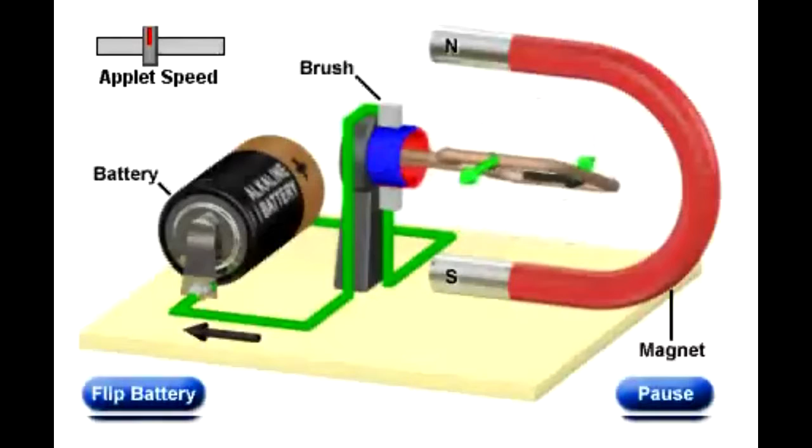This video is to show the DC motor principle. You'll see how the DC motor works and how it turns. First of all, we'll look at the magnetic lines of force from our magnets. Next, we're going to apply current through our armature, and we'll see that there will be a resultant force on our armature which is going to cause the armature to spin.

This resultant force will continue in the same direction and keep the armature turning. You can see once it reaches this point, there is a gap in the commutator, and there will be no more current temporarily through the armature. At this point, it relies on the inertial force of the armature just to move it over so that it will recontact once it spins that little bit further.

Now you can see the brushes have recontacted the commutator and the current is going in the opposite direction through the armature. However, it's still relative in the same direction according to the fields, and this will keep the motion going in the same direction, and around it will go.

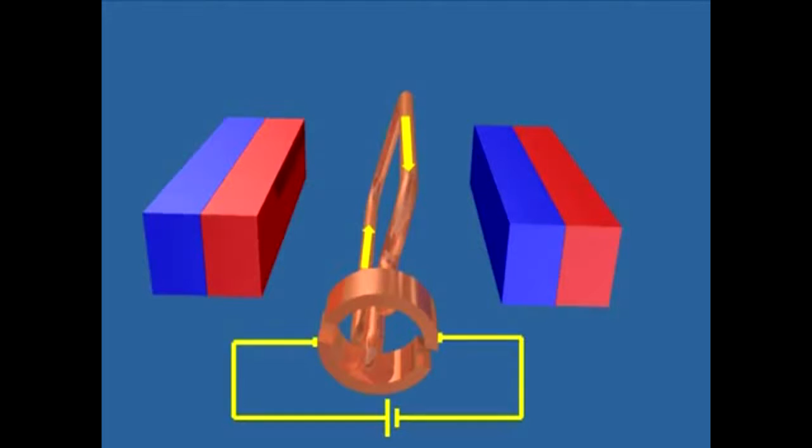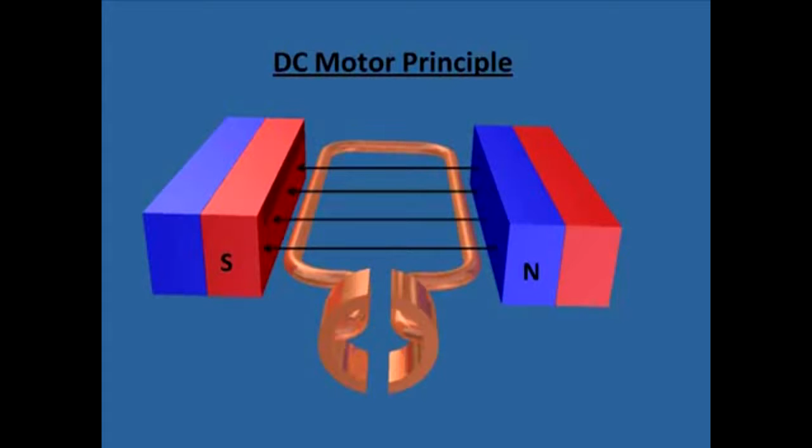This video is to show the DC motor principle. You'll see how the DC motor works and how it turns. First of all, we'll look at the magnetic lines of force from our magnets. Next, we're going to apply current through our armature, and we'll see that there will be a resultant force on our armature which is going to cause the armature to spin.

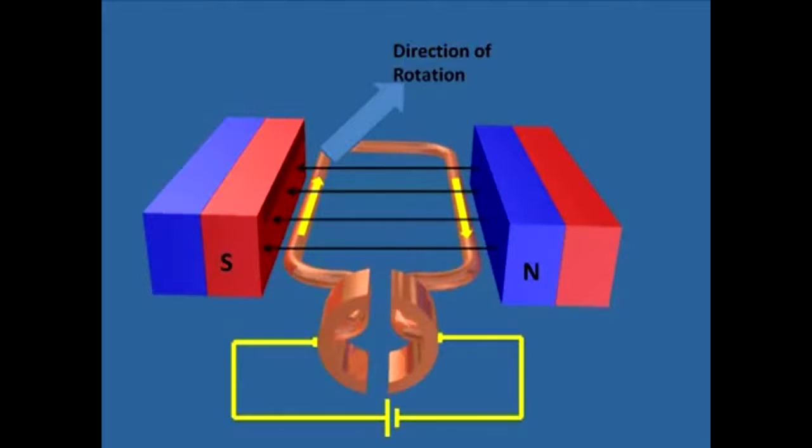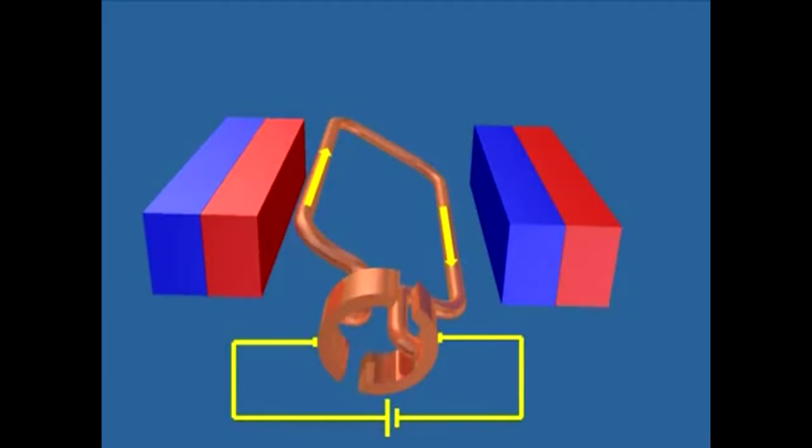This resultant force will continue in the same direction and keep the armature turning. You can see once it reaches this point, there is a gap in the commutator, and there will be no more current temporarily through the armature. At this point, it relies on the inertial force of the armature just to move it over so that it will recontact once it spins that little bit further.

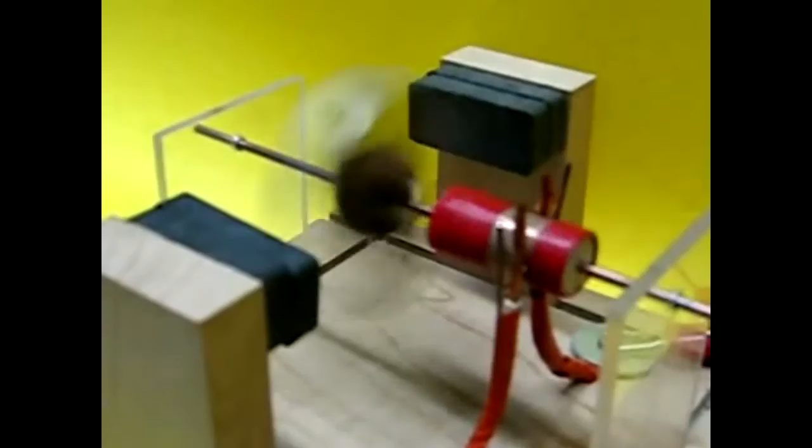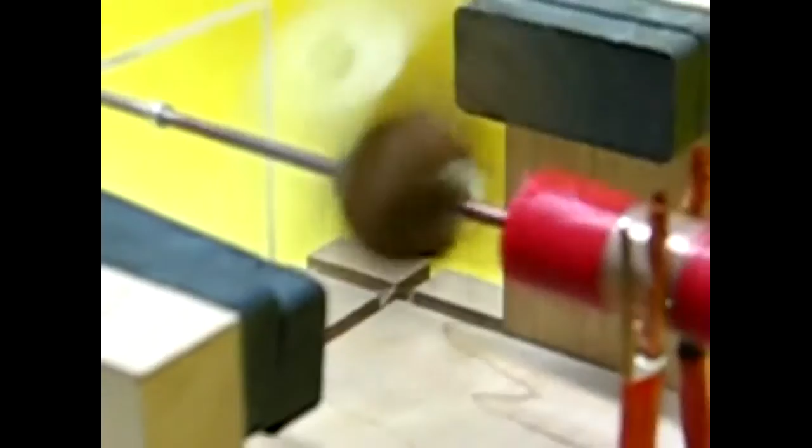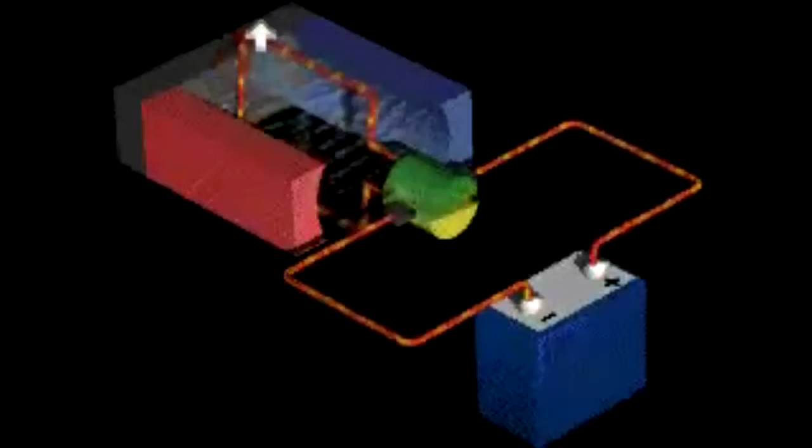In this simple electric motor, a current passes through a coil in a magnetic field. This forces the left side of the coil upwards, and the coil rotates. When the coil is vertical, the current shuts off for a second. The current is reapplied, and the other side of the coil moves upwards. This is the simplest model of how electricity creates mechanical energy.

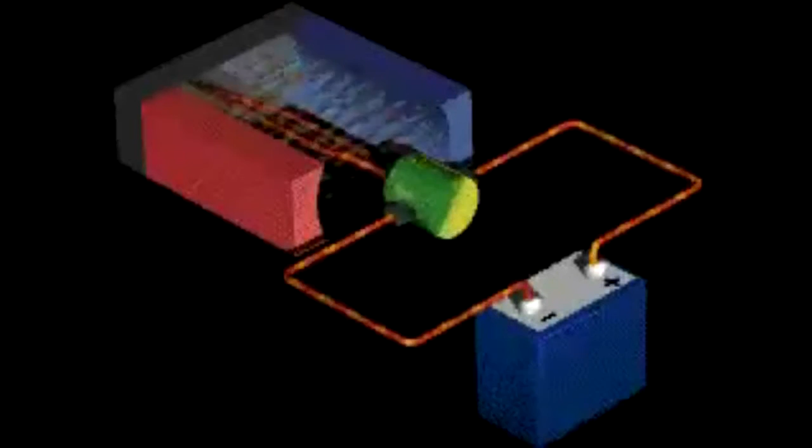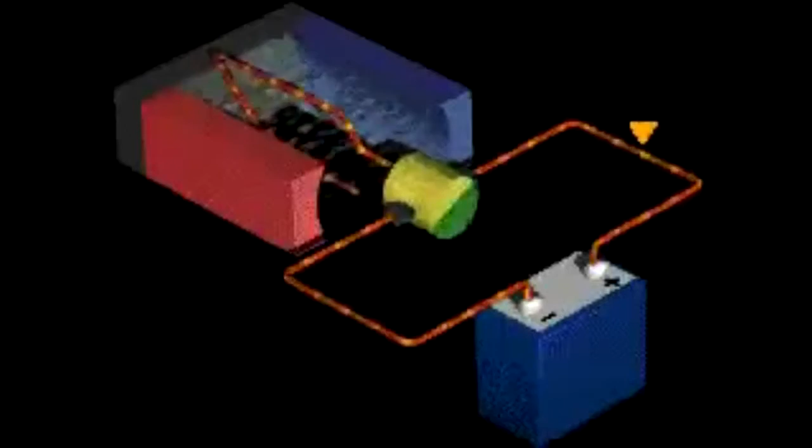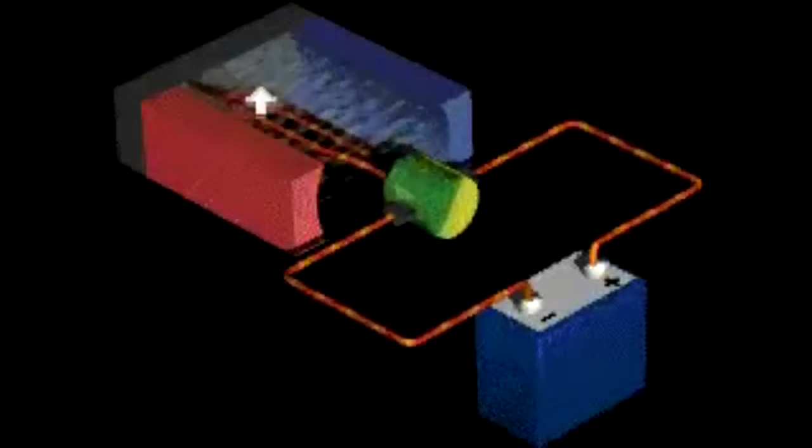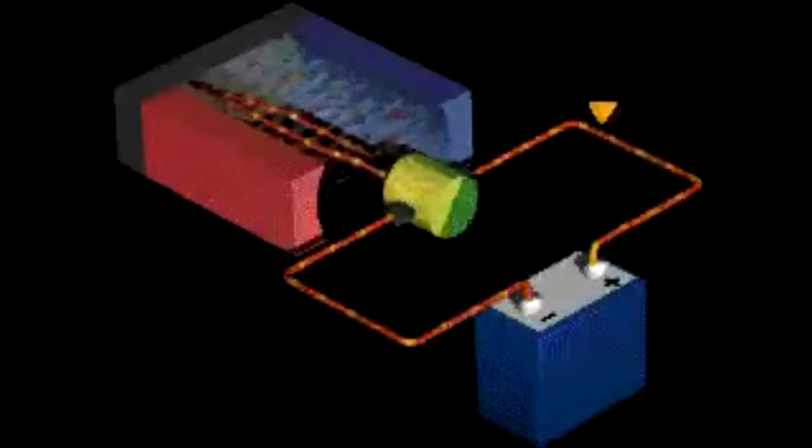In this simple electric motor, a current passes through a coil in a magnetic field. This forces the left side of the coil upwards, and the coil rotates. When the coil is vertical, the current shuts off for a second. The current is reapplied, and the other side of the coil moves upwards. This is the simplest model of how electricity creates mechanical energy.

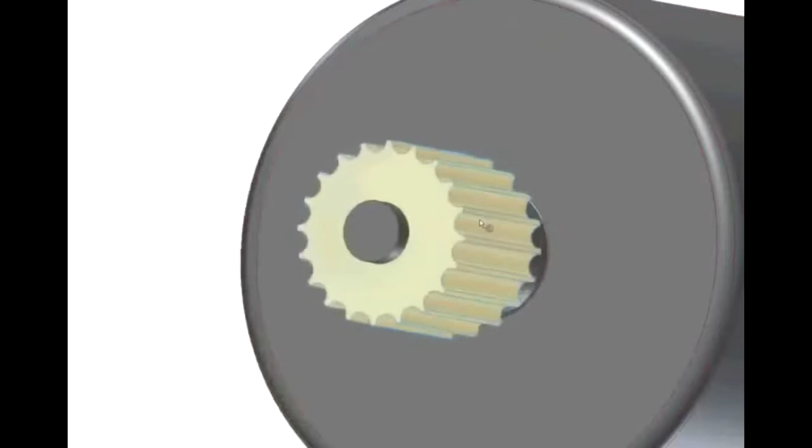Today I will show you what's inside the DC motor. Now I have prepared my work model of a DC motor for this reason, and as you can see this is fully functional. It can rotate either way, clockwise and counterclockwise, and on the back side you can see the bearing that holds the shaft, and the shaft itself, and the two poles that the motor is powered from.

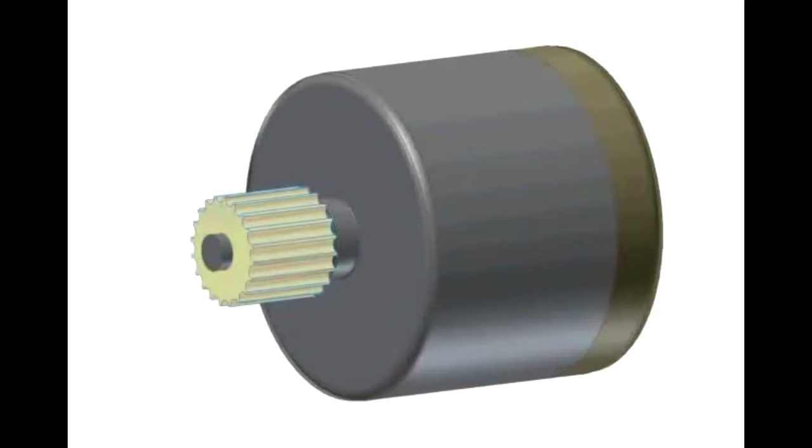Now instead of breaking the motor apart and explaining each part as I take it out, I would rather prefer to go backwards, and I will start from scratch and build the motor from the beginning. Okay, now I strip the motor, and there, nice. So this is the basic part of the motor. This is the shaft, and on the shaft the two electromagnets are welded. Actually, these are only the cores of the electromagnets.

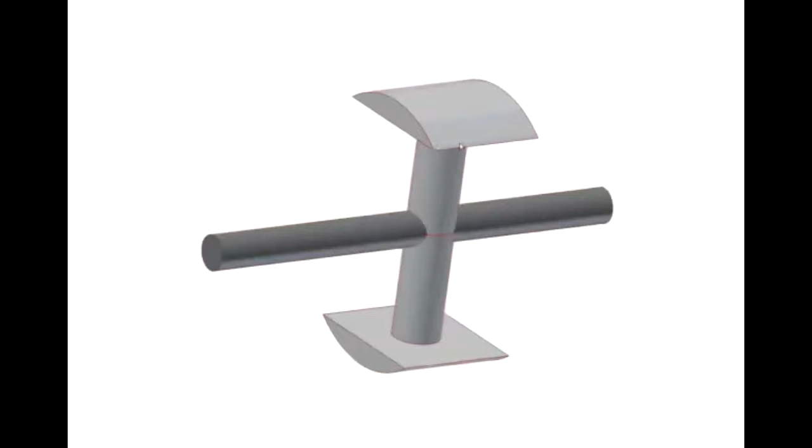They still lack the coils, and the coils are actually the ones that I will start with making the motor. The coils are made of thin single core wire from copper most of the times, that has no plastic shielding outside. Instead it has a special paint, and this will prevent the short circuit between the windings. And there. Now this will be the first coil of the electromagnet.

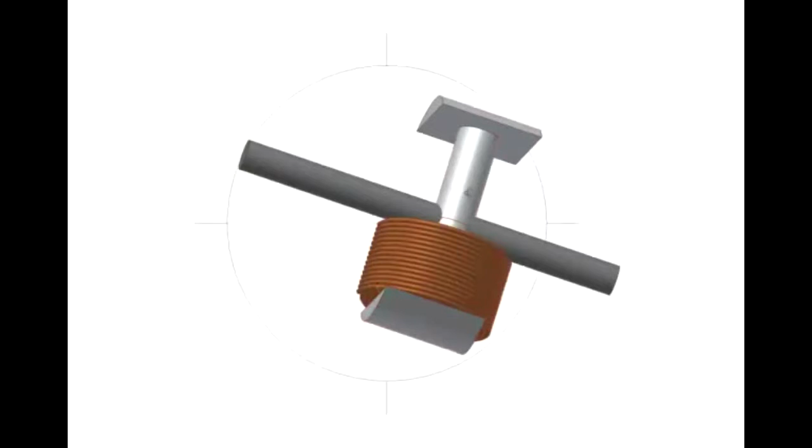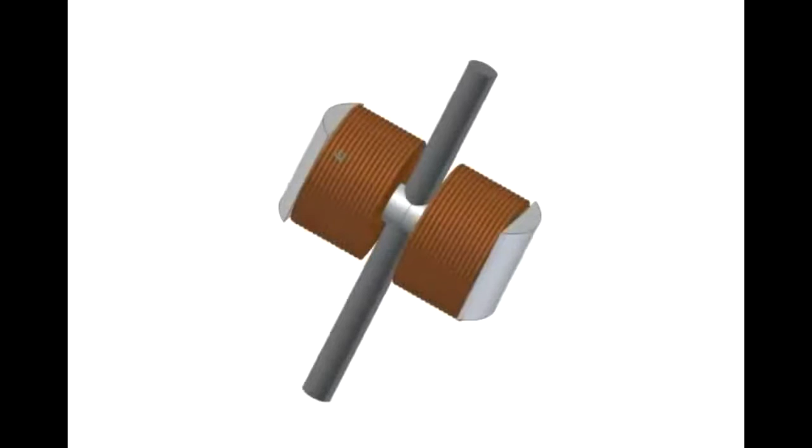The motor has actually two electromagnets, something that does not happen in real life. But this motor is made only for educational purposes, and I try to keep it as simple as possible. So this is the other electromagnet, and now it's starting to look like a motor again, and it's time to give some power to the coils. This is the tricky part of the DC motor. So to provide the power, I need to build something that's called a commutator.

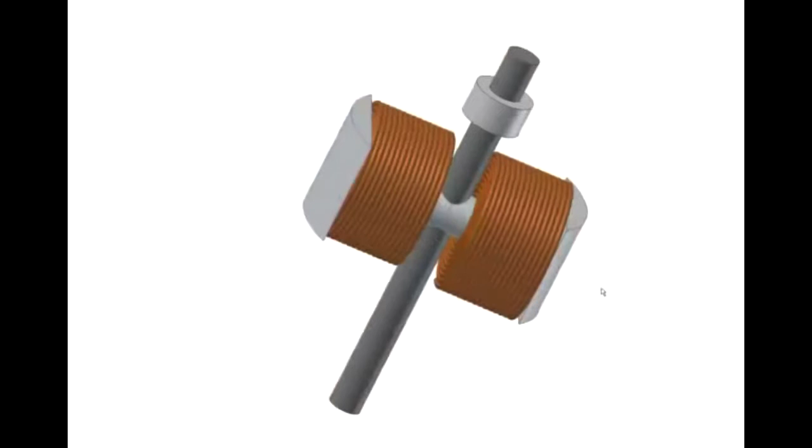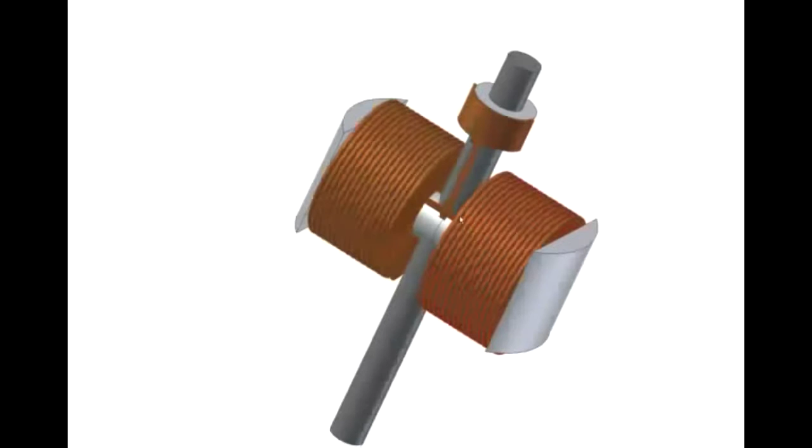The commutator is actually a ring. This ring is above the electromagnets, and it's fixed on the shaft. This ring rotates along with the shaft, and the ring is made of non-conductive material. This is very important. On the perimeter of this ring, there are two other parts that are made of conductive material. This is the first part of the commutator, and it must be able to stand friction in high revolutions. You will see later why.

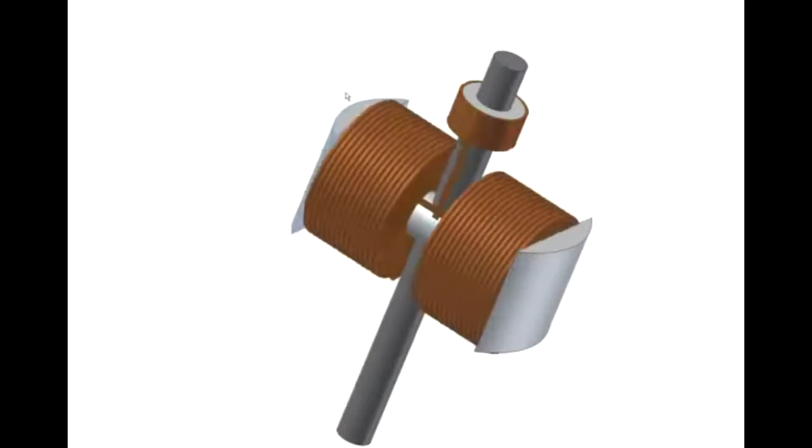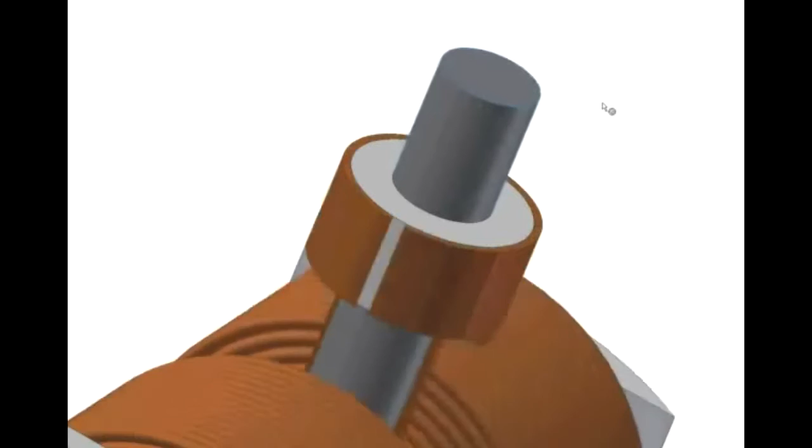On the other side, there is the same gap. And now let's take a look around. So we've made the commutator piece. Now it's time to put something to hold the shaft in position while rotating. And what could be better than a set of nice ball bearings? There. The motor has actually two bearings, one above the commutator and one under the coils.

The bearings are very important on the motor, and actually the bearings along with the brushes are the parts that wear off on the motor. Now enough with the bearings. Now, according to the theory of operation of these motors, the electromagnets rotate inside the magnetic field. So now we need to make a magnetic field. And this field will be made out of two permanent magnets placed one opposite the other.

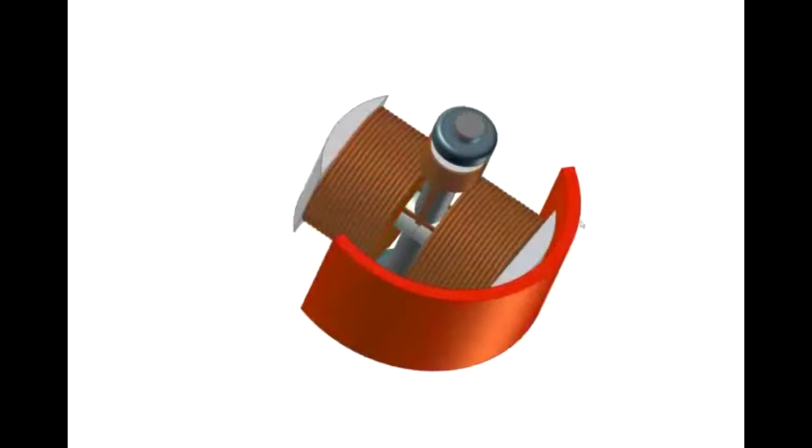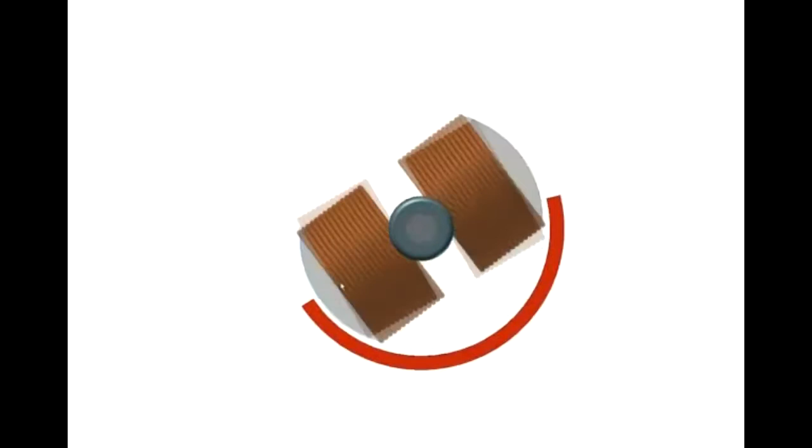Now this is the first piece. This piece of permanent magnet has its north pole facing the coils of the motor. The coils will rotate in front of this magnet, and it will be actually in a very close distance, about 1 or 2 millimeters for small motors. And now we need the other half of another magnet with the other pole facing to the coils. Now this one. This magnet has the south pole facing to the coils. So between these two magnets there is a permanent magnetic field, and the coils will rotate inside this magnetic field.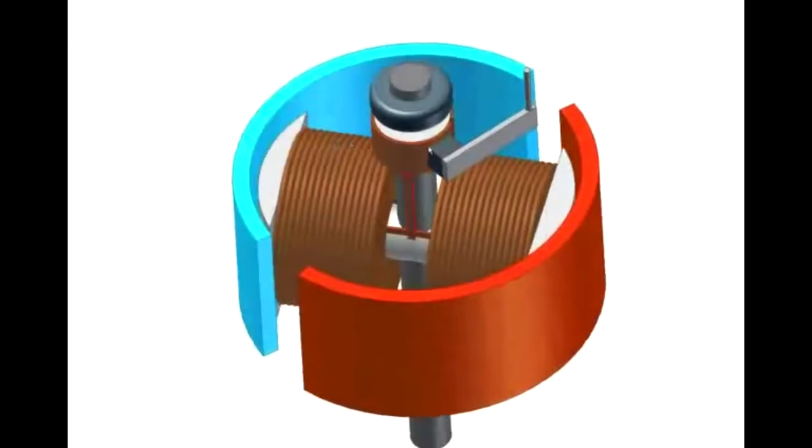I will continue making my motor. The internal parts are almost ready. What I need now is a way to provide power to the coils while they rotate. Now remember that the poles of the windings of the coils are both connected to the two pieces of the commutator. Now there is another part called the brush, and this is actually why this kind of motor is called brush motors. The brush is a piece of metal that acts like a spring. On one end there is a conductive material, very durable to friction, like the one used for the commutator. Usually this is made out of carbon.

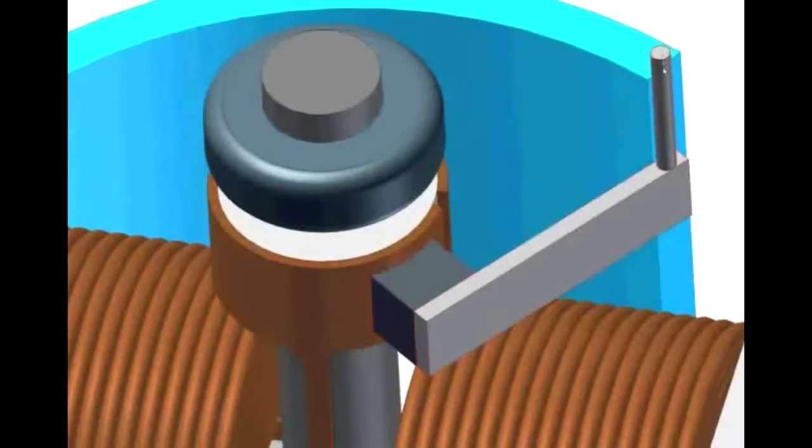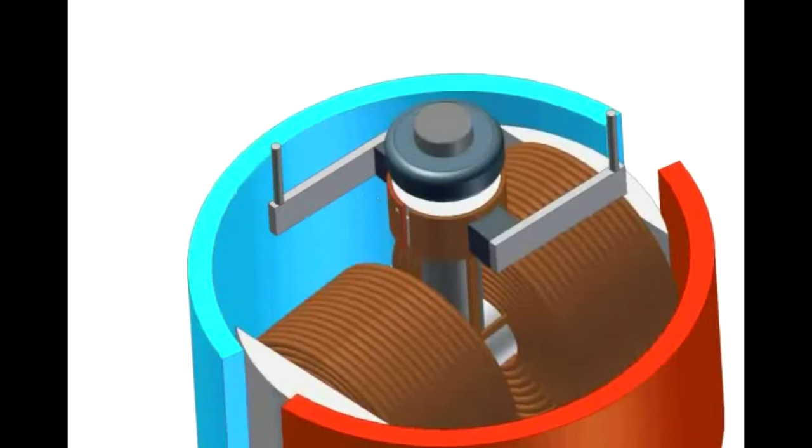Now the metal will push this piece on the commutator, and so it will create contact between these two. On the other end of this metal there is the power connector of the motor. This is where you connect the power actually. The current goes from the power connector through the metal spring and through the carbon connector directly to the commutator, and then it's provided in both coils. And of course there is another brush opposite this one with the same structure of operation. Of course it will give power to the other piece of the commutator.

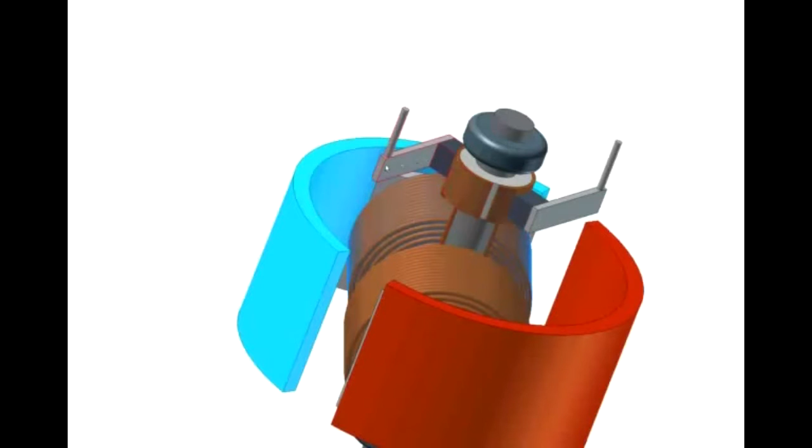Now watch what happens while the shaft is rotating. The brushes have always the same polarity as provided by the power supply, but as the shaft rotates, the polarity driven to the coils is changed, because every time, for example, the left commutator goes one time to the positive and one time to the negative power supply. And this is how the electromagnets change their polarity. That's the tricky part of the DC motor.

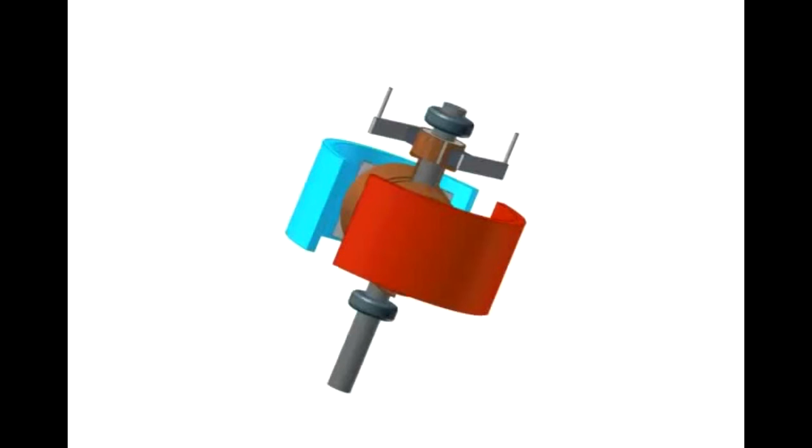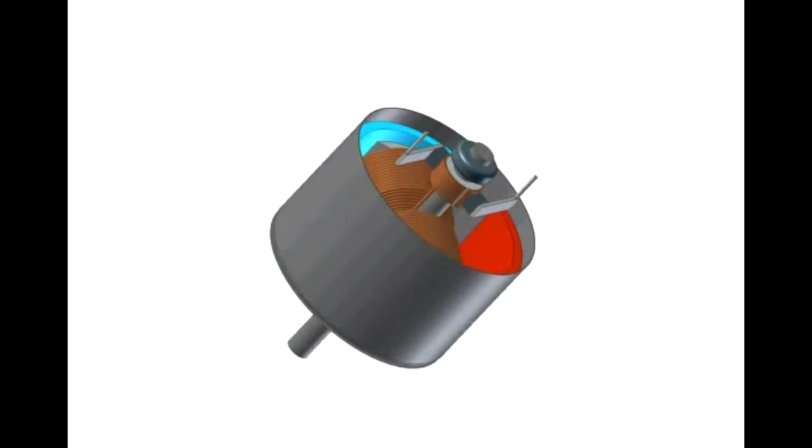Perfect. Now it's time to put it all together, and I will put the housing of the motor. It has a proper place, of course, for the ball bearing, and the magnets are also fixed on the walls of this housing. Now that's the housing, and our motor is almost finished. It looks nice. It's time for the final part. I don't really know the name of this part. I will call it a cover. Actually, it's a cover. It covers everything, and it also has a place for the bearing on top. It will hold the bearing on top, and it also has two holes for the power terminals. And the motor is ready, fully functional, everything in position. That's it.

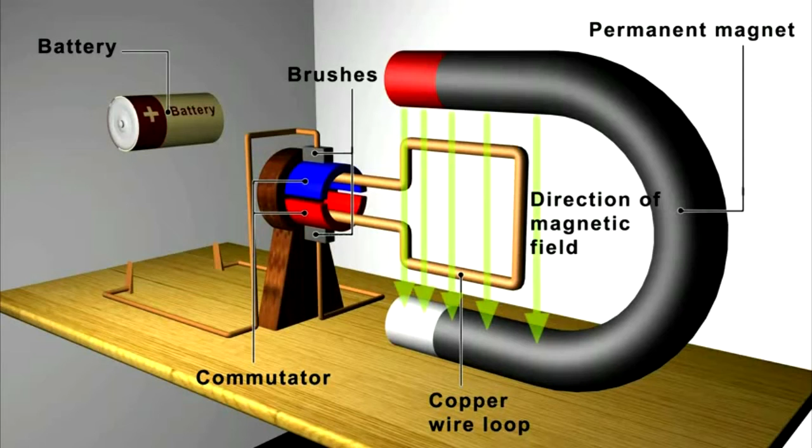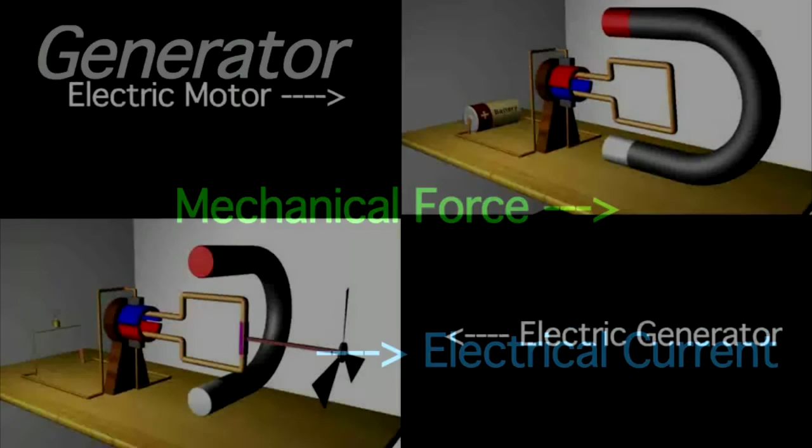Now, when we pass current through the circuit, this creates a magnetic field around the wire, which interacts with the field of the permanent magnet to produce a rotation of the loop that looks like this. The electric motor and the electric generator are related like two sides of a coin. In general, the task of an electric motor is to convert electrical current into mechanical force. On the other hand, an electrical generator converts mechanical force into electrical current. So as you can see, we can simply rearrange our motor into a generator.

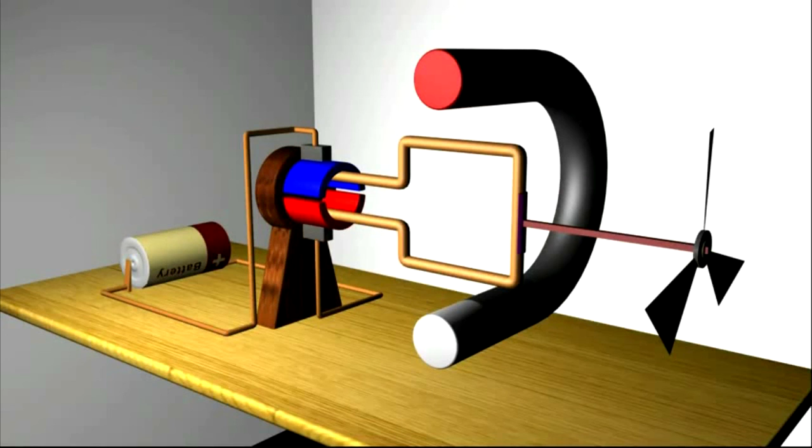In this case, we will provide the mechanical force with a windmill rotor attached to the loop and connect a bulb in place of the battery. We will leave the magnetic field as it is, and as the wind rotates the blade, an electrical current is produced.